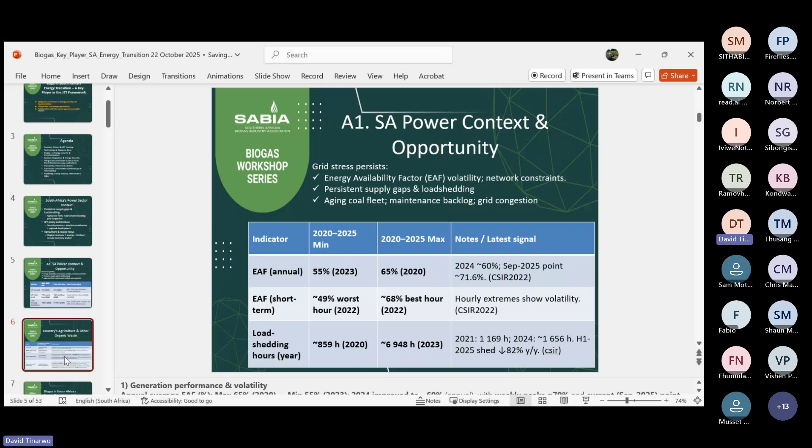Then also on the other side, we look at the amount of waste which we generate from food and from our municipal sewages, from our agriculture in the form of poultry farming, and also abattoir, where we slaughter our animals for meat. We generate quite a lot of waste, which is really a problem in the country, to say how do we manage that. Then we look at the potential of biogas to solve that problem.

So we say, why biogas then? Why do we think biogas can actually be a solver of these problems? The reason being that biogas technology can change all these organic residues to energy and fertilizer. And that makes the core of a circular economy, where we will actually not have anything which we would call waste, which goes unimproved to make a difference in our lives.

So also then we look at what we get after having converted these to energy and fertilizer. In terms of energy, it has quite more advantages than the other renewable energy technologies. Take, for example, you have solar, you have got wind. And with solar, you cannot say absolutely I can assure you that I will always have my energy, unless you are saying you will have a big storage in terms of battery.

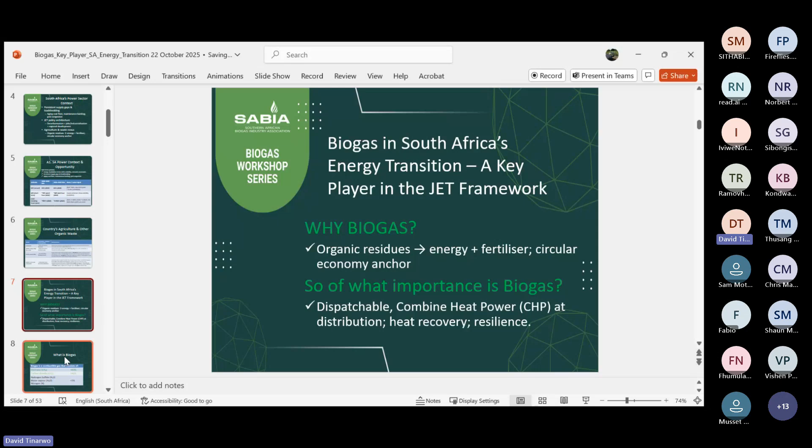So also, when you look at the conversion of this biogas to energy, you can actually increase the efficiency of this by generating electricity, but at the same time recovering the heat for other uses. So that way, it suits very well as an efficient way of converting waste to energy, and serves quite conveniently more than these other technologies of renewable energy, which we know, like solar and wind.

So what is this biogas? For those maybe who may be novices in this area, just a quick review on what this thing is. The biogas, of course, we get it from anaerobic digestion of organic material, and this results in a gas which is composed of many gases in it, which we call biogas.

The constituents of this biogas has plus or minus 60%. Of course, it ranges depending on the feedstock, and also the time it has taken running. So we have as an average plus or minus 60% of that gas being methane. Then around 40%, plus or minus, of that gas being carbon dioxide. Then these other gases, which include hydrogen sulfide, water vapor, and nitrogen, constitute less than 5%. So bulkily, we have methane and carbon dioxide.

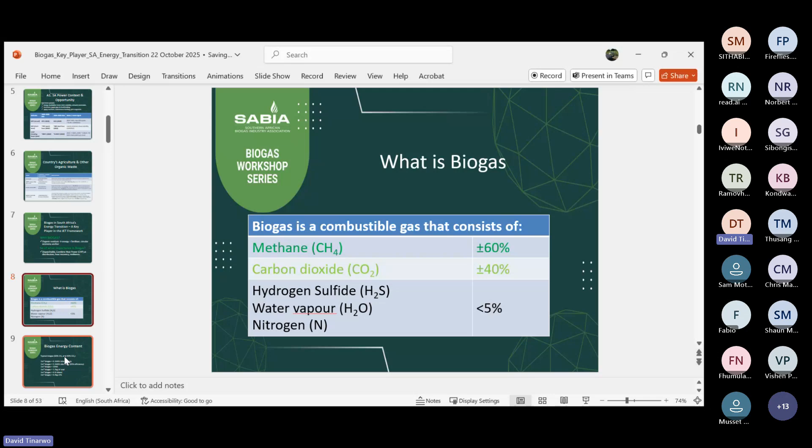And the most important gas, which we are always going for, is the methane, because the methane burns, and we need to burn it to get the energy which we need, convert it into different forms of energy, heat or electricity, and so on.

So to give you a rough idea of the equivalence of the biogas to other forms of energy which we already know. For example, 1 cubic meter of biogas is equivalent to about 6.1 kilowatt hour of total energy, which includes electricity and heat.

Then on electricity, because of the conversion through the generator, which loses some energy through heat, we remain with about 2.1 kilowatt hours of electrical energy. So you see the efficiency of that conversion from gas to electricity is around 35%. But of course, if you then harness the heat, you improve the overall system efficiency.

So the other equivalents are biogas with coal, with diesel, and with LPG. You can see 1 cubic meter of biogas is equivalent to 0.4 kgs of liquid petroleum gas, the one which we buy from the garages and cook with. So this can actually really substitute that gas for cooking.

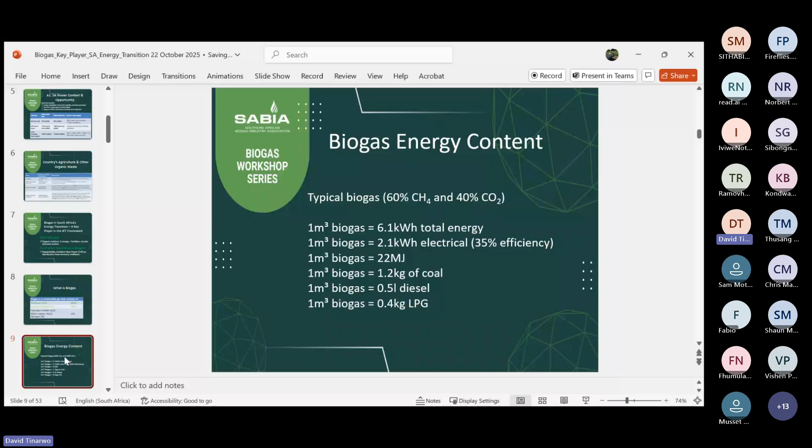All right, so how does it go? Just to quickly review how we generate the gas, of course we have organic waste, which is put into an anaerobic digester, which is a container that is airtight and watertight. It does not leak water, and it does not allow unwanted oxygen in, so that the process can take place and generate the gas.

But one more important thing is, besides generating gas, the whole lot of stuff which remains, which we call digestate, the remaining slurry stuff, is a very good fertilizer for farming. That means after getting your gas, you don't throw away what is remaining. You actually use it to replace synthetic fertilizers, which are detrimental to the soil, detrimental to the environment, and even detrimental to the pocket.

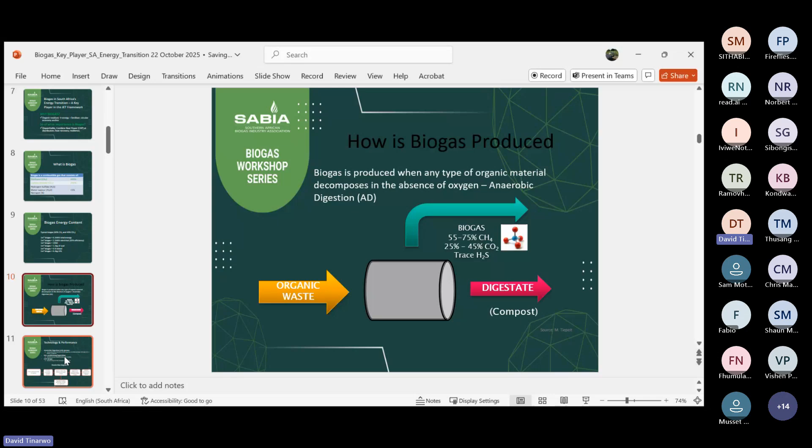All right, so just a flow chart of what takes place in this technology. We look at how we move from the starting point until we get to the gas and use. So the first part is intake, where we are receiving the feedstock, which is organic material that can be animal waste, plant waste, or even municipal organic waste. We receive it, weigh it, separate and treat it, macerating it, cutting it into small pieces for easier digestion, then introduce it into the digester.

The digesters can be of different kinds: continuously stirred tank reactor, or plug flow, or dry, and we also mix it so that the process takes place very well, so the bacteria responsible for generating the biogas can reach all particles of the feedstock.

Then the gas comes out, and we can clean that gas and remove unwanted gases like carbon dioxide, hydrogen sulfide, and water vapor. We can clean it and make the gas almost high quality methane for use in CHPs, combined heat and power generators, or in other generators, or any other function, or even to run vehicles at that grade.

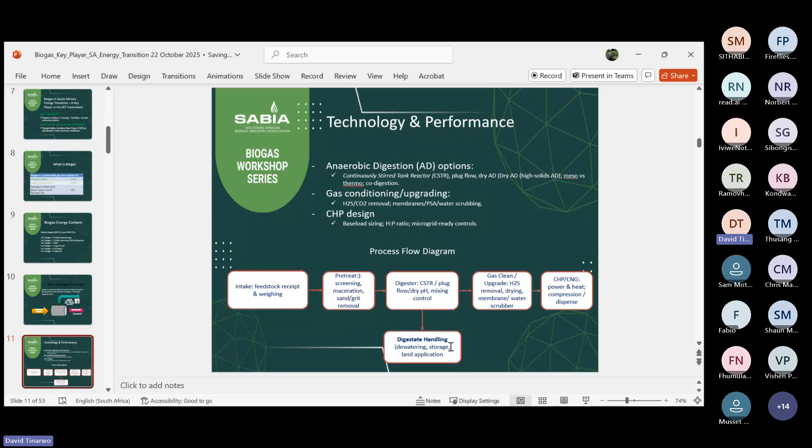So already I am pushing you to understand how this covers all the functions of these other forms of energy and fertilizer which we originally have. So biogas is covering all that. And if you look from the sorting of the waste, carrying of the waste, to processing of the waste, and generating and manufacturing of the generators to run, manufacturing of vehicles to run on biogas, light equipment and all the stuff, all those are already pointing to creation of jobs in the chain. So biogas is coming with a lot of job creation.

If you look at farming, where you are getting the waste, quite a lot of activity takes place. If someone forgets about buying synthetic fertilizer and concentrates on getting fertilizer from the biodigester, you can imagine how many people will be involved in that exercise.

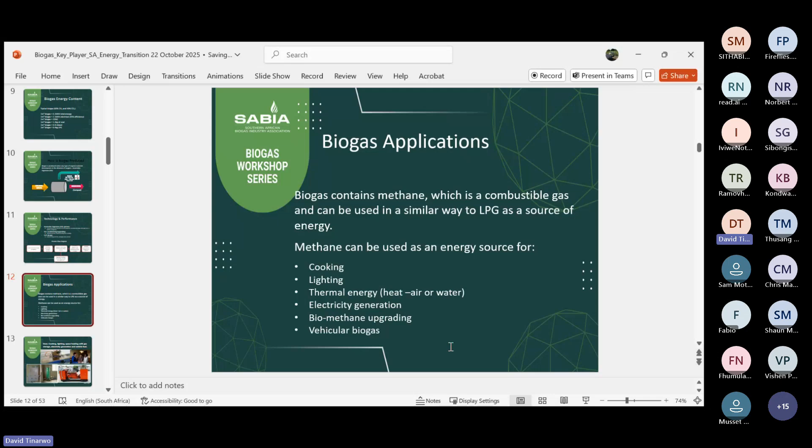So this next slide shows a range of uses which I was talking about, like cooking, lighting, space heating, and even electricity generation. On top of that, we can also store it in very big tanks, and that already points to that collaboration which I was talking about with the natural gas industry, and of course for running vehicles.

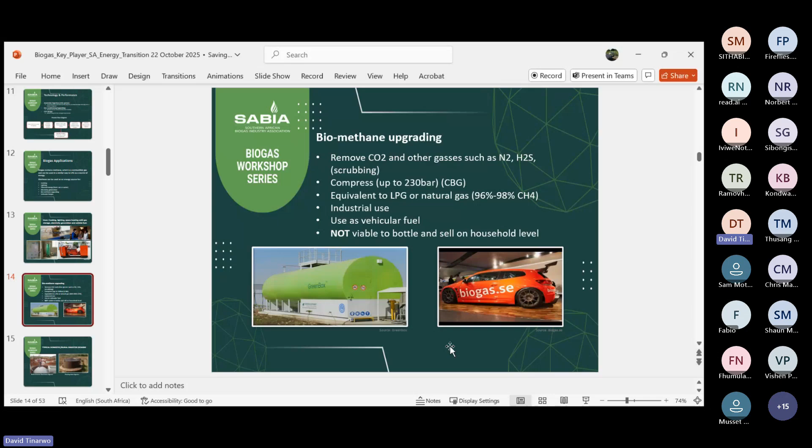Yes, we also need to have a rough idea of the different types of digesters. Here in South Africa, we've got quite a number of types of digesters which are implemented. Some of them are brick built, done underground. Others are, of course, the floating dome, which is mostly found in countries like India. In South Africa, there are not very many of this kind of digester, but in India there are so many.

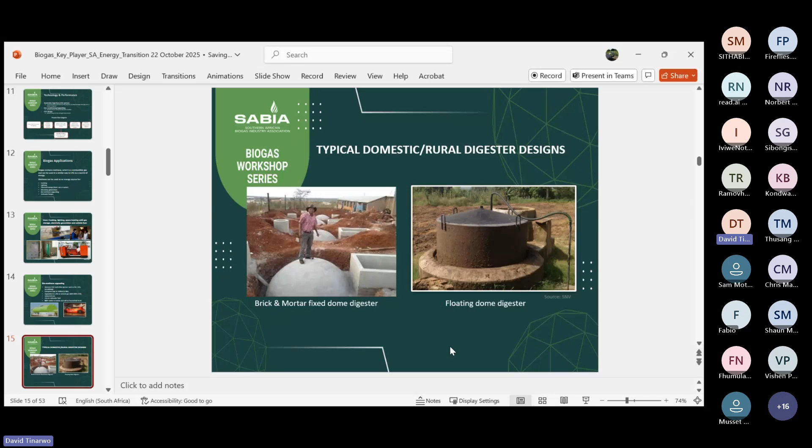But also here in South Africa, we have quite a number of prefabricated digesters, like for example the Biogas Pro, manufactured here locally.

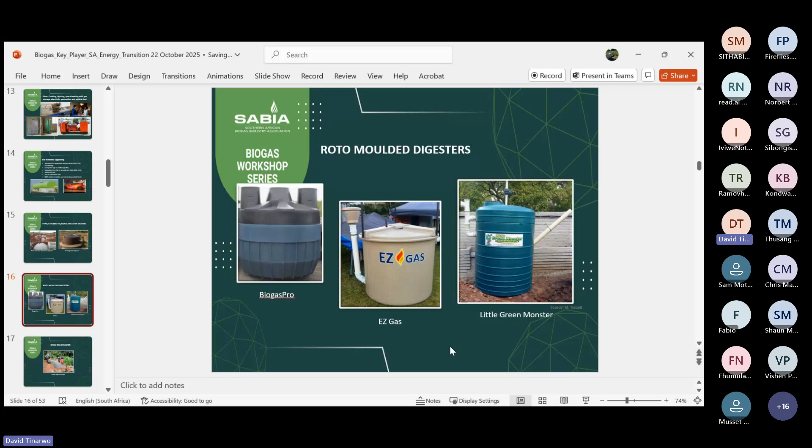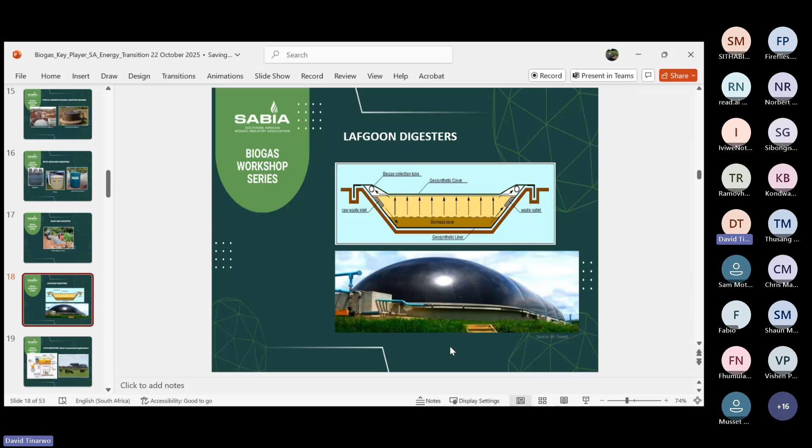This is made by a company called Gamma here in South Africa, and others which are coming. Many people are starting, some are even using Jojo tanks to make digesters. We also have tube digesters, which are easy to install and cheaper to buy. We also have lagoon digesters, which are mostly suitable for dairy farming, where you want to capture the slurry lagoon from the milking parlor and put in the conditions for biogas generation. So these are the different types of digesters which we have in the country.

And of course, in our wastewater treatment plants we also have digesters. It's a surprise that not much has really been done to harness the gas. In most of these sites, you find they flare it. If it is not flared instead, and captured and harnessed for energy use, then that will constitute a very good candidate to really fit in the just energy transition.

Right, so here I summarize a bit. I don't know, since it is not in presentation mode, the slide might not be properly visible, but here I'm summarizing why biogas, why now, and how it supports the just energy transition.

We are putting biogas in the middle, and we have a triangle where the vertices talk to those components which it responds to, like energy security and costs, where we are solving the persistent load shedding and high tariffs of electricity which we are experiencing. So we can avert that problem through the utilization of biogas. We are also decarbonizing the energy sector by using biogas, where instead of leaving animal waste to emit all the methane into the atmosphere, we make that methane emitted in controlled situations and harnessed and used.

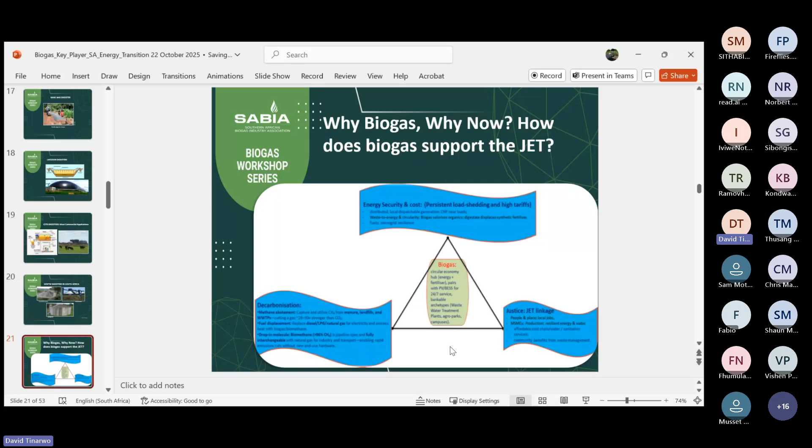Then also, if we look at the creation of jobs, that really answers the proper linkage of the just energy transition, where we have a lot of MSMEs working in different ways contributing to biogas technology. Others can be manufacturing stoves, refrigerators, heaters and so on which use biogas. And that is creation of employment and hence regional development.

So the next part of my presentation is just to talk slightly about what can be done. But otherwise, the main issue I've already put forward is that we've looked at biogas as a means to give energy security. We've looked at biogas from the social aspect, the creation of employment and organic food from organic fertilizer that improves human health. So in that way we are servicing an imperative from the just energy policy, and also we look at reduction of costs. We know our energy is currently so expensive, and with biogas we can actually reduce all those things.

So now, when we look at its applicability, biogas can be generated anywhere where there is waste, and hence it's suitable for decentralized electrification, decentralized energy supply. So we can hybridize it, putting it in as a component of a hybrid energy system where we integrate solar, biogas, wind and others together.

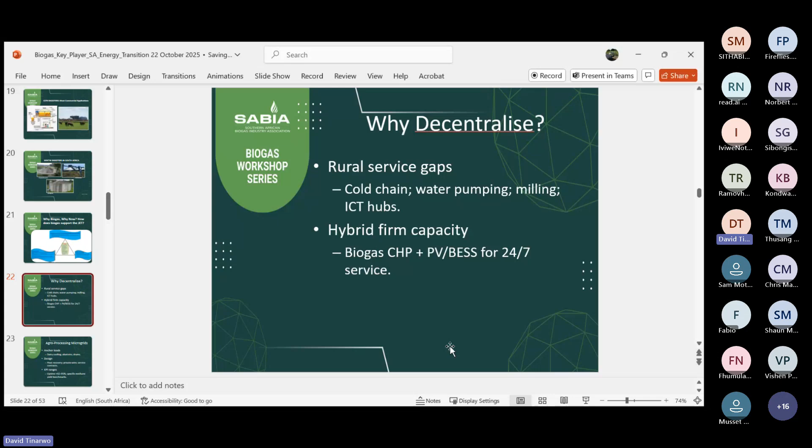You need to be slightly bigger so that you can run the generator for a reasonable time. All right, so also we have some

functions in agro-processing, microgrids, where we have biogas playing a role in a dairy, cooling and abattoir, dryers, and so on. And we also have recovery of heat, and we can even improve this biogas to reach qualities of our natural gas. So that is a possibility. So that way already we are saying we can actually make biogas collaborate with the natural gas.

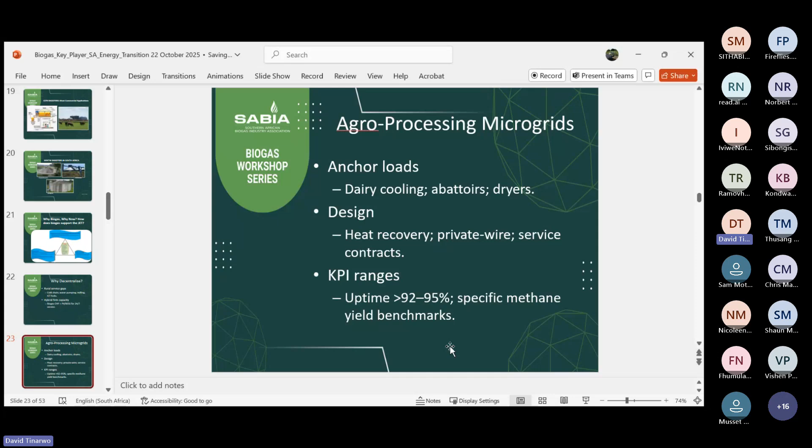On irrigation, agriculture, as I have said, we have challenges of water in the country. We use water for generating biogas, but at the same time, that water is not used and lost. It is still recovered and utilized for irrigation, and which is irrigation not just with water, but with water which is improved with the minerals or nutrients for the plants.

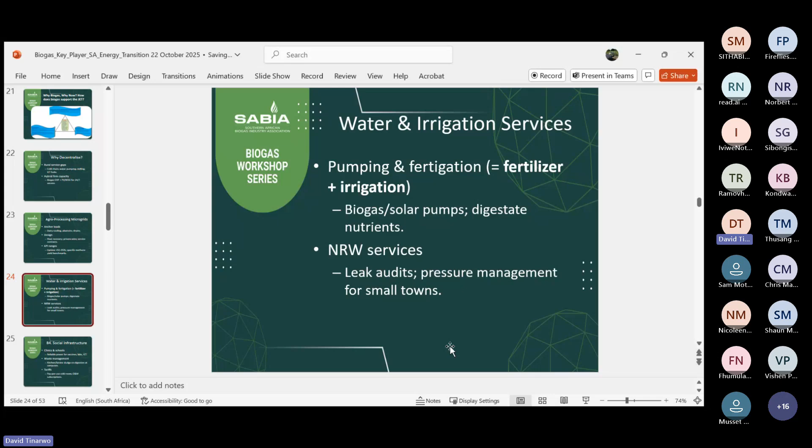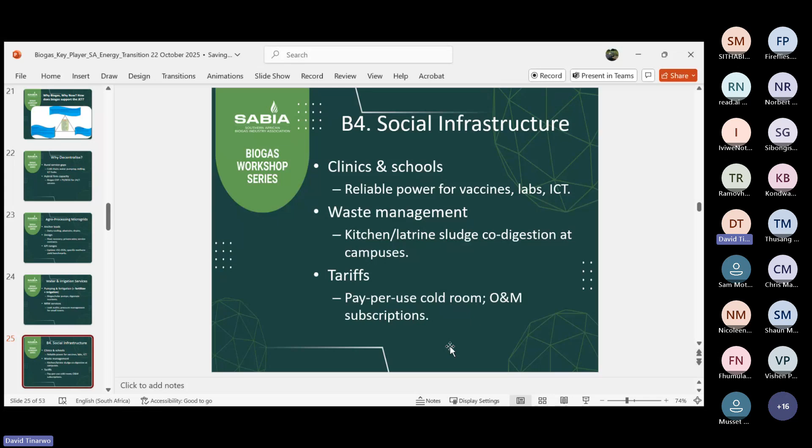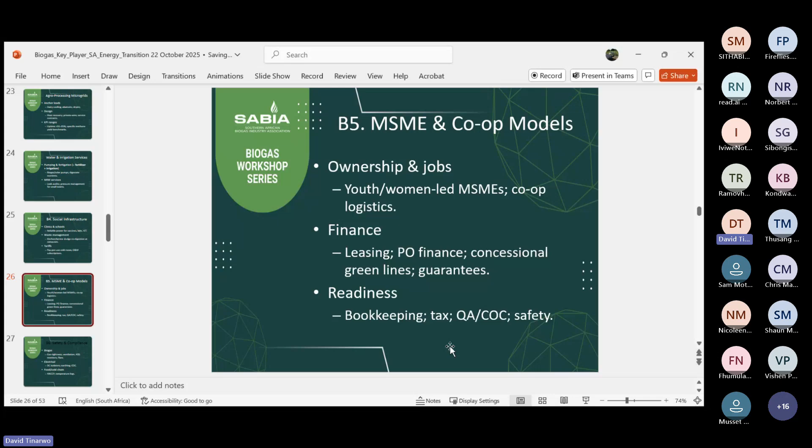This is talking again to those MSMEs and cooperative models where they are working together with those institutions like schools and hospitals and all the stuff.

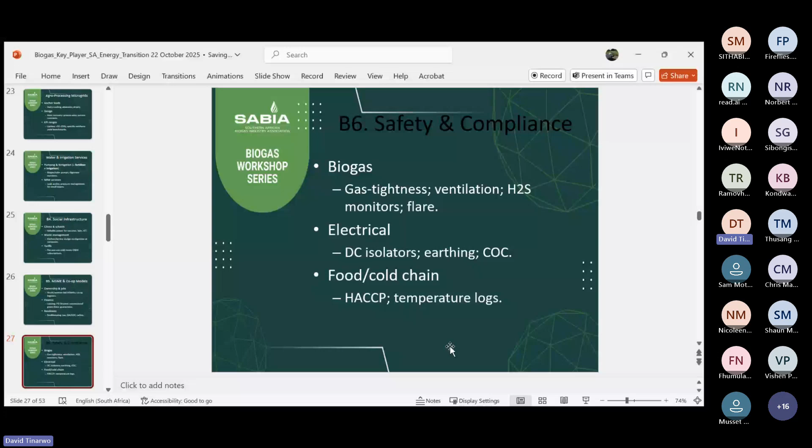Then also, of course, in doing that, we need also to look at compliance in terms of safety, how to use it, and so on. Although we can safely say at lower pressures, it is even much safer than the LPG. But of course, details of what needs to be done in order to secure safety of people in the use need to be outlined wherever it is being used.

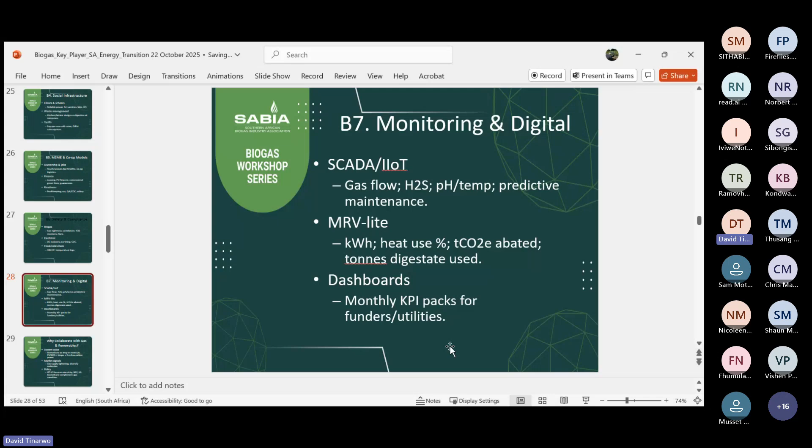And monitoring, of course, this is when you are having the systems which are working. We can also do improved monitoring systems of this to see how our systems are working, even remotely, and so on. So you can see all those are talking to need for creation of employment, research, and so on. So many youths will be involved even to design those SCADA monitoring systems. They need to be designed by people and hence actually creating employment for them.

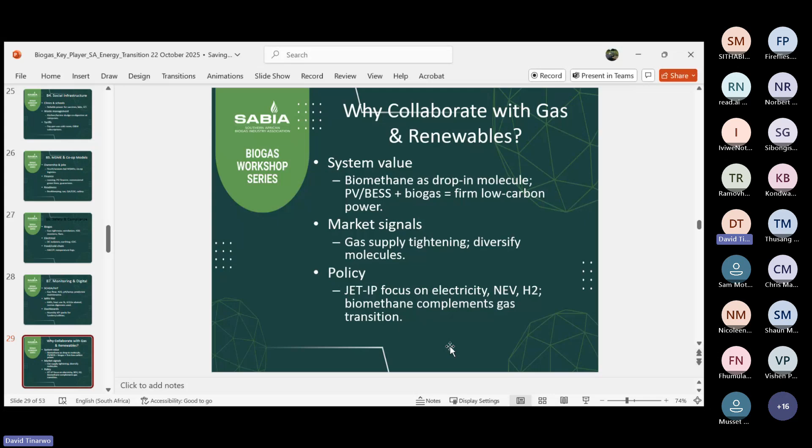Then, of course, I was talking about this collaboration with natural gas and why do we need that? Of course, because the biomethane can actually be improved and can be also used in hybrid systems where you have got other forms of energy. And also gas supply needs to be properly controlled and all the stuff.

I think let me just stop here and allow questions to come. I have so many slides, but I think the gist of the story, which is looking at the biogas in the just energy transition, its contribution, its role, I have touched. So I can stop here to allow questions so that we can even explore more during the question and answer. Thank you very much.

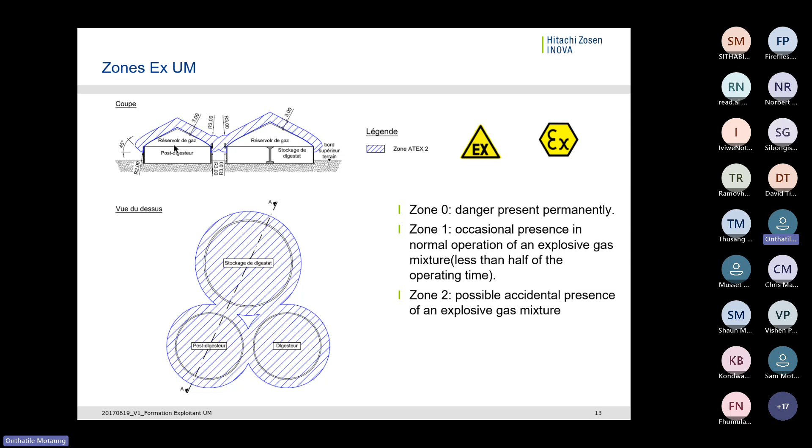All right, I'll step off from there now. So now we'll look at the tanks, the biogas tanks - basically the roof, what the roof looks like, heating, agitation, and auxiliary equipment. The tank roof of the biogas digester - let me just go back if I can.

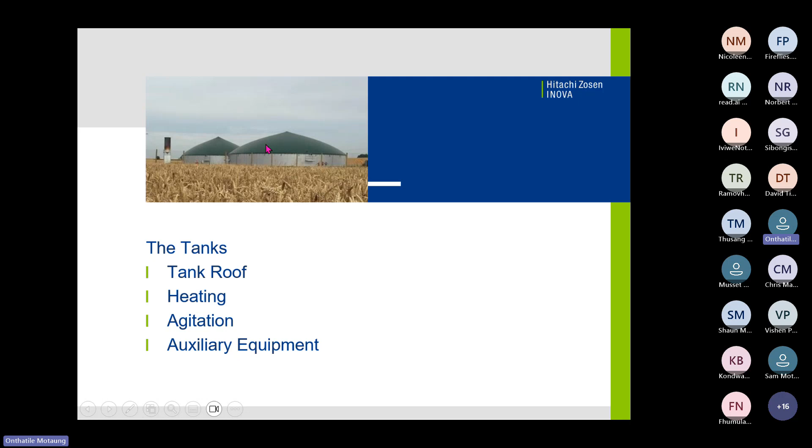So if you look at this, this is the type of digesters that I'm talking about. These are the stirred, continuously stirred tanks. The roof is really this dome-shaped membrane. So that's what I'm going to be talking about now.

This is called a floating tarpaulin with double membrane. So it's a tarpaulin, which is basically a canvas. It has a double membrane, an outer and inner membrane. The outer membrane is PVC membrane, coated with anti-UV protection. It's basically a cover that protects the inner cover. That's the top cover, the outer cover. The inner cover is a low density polyethylene membrane.

This one is for gas storage. So the top cover protects the bottom cover because UV damages plastics and rubbers. So the protection that the outer membrane offers is against the sun, but also against moisture like rain, and the forces that can be imposed on the gas storage membrane by wind and rain. The outer membrane protects against that, while the inner membrane is used for gas storage. So basically, as the gas gets generated, the inner membrane expands to provide temporary gas storage in there before it can be fed into another tank, which is a storage tank.

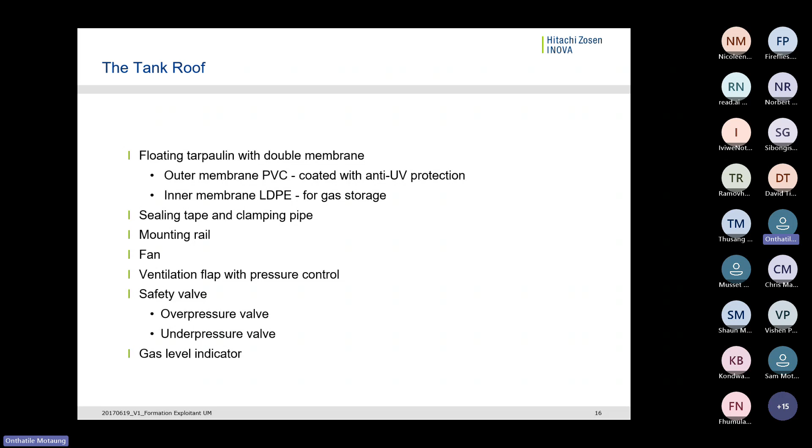There is a ventilation flap for pressure control as well between the outer membrane and the inner membrane. There is a safety valve that helps for overpressure and also under pressure. And then there's also a gas level indicator on the tank.

I think if you can see on here, do you see my cursor, right? Yes, we can see it. You can see it, yeah.

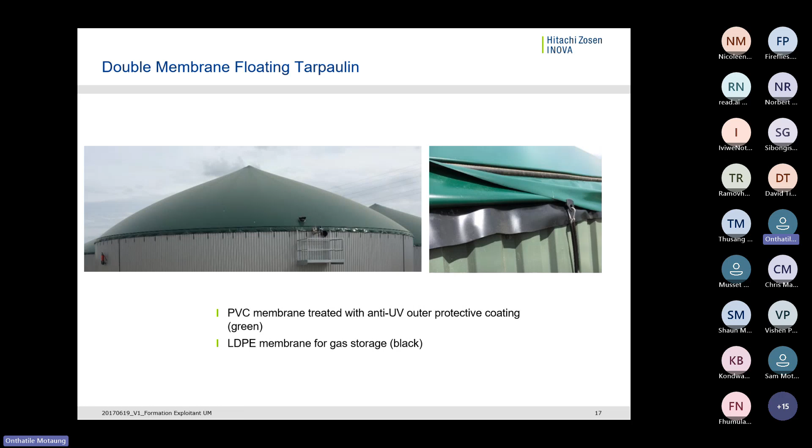So you can see again, though I'm not talking about this today, but I'll just mention, you can see there is a net here. Inside there is a net before the inner membrane. The net, most of the time, is used for biological desulfurization inside the digester. It will be coated with a slurry, and then there is an oxygen generator that will blow in a tiny bit of oxygen to enable a reaction to happen on this net.

So I've had the opportunity of traveling with the maintenance guys who overhaul and change the equipment for the digesters. Once, after 5 or 10 years, the digester gets emptied and they take out stuff. You can see on the nets and on the roof of the digester inside, yellow sulfur collecting there. But I've just learned that this net also, with time, builds up a lot of elemental sulfur, which will actually cave in and fall into the digester, and then go out with the substrate, with the digestate. The sulfur gets added back to the digestate, which is used as fertilizer, as the professor has already indicated.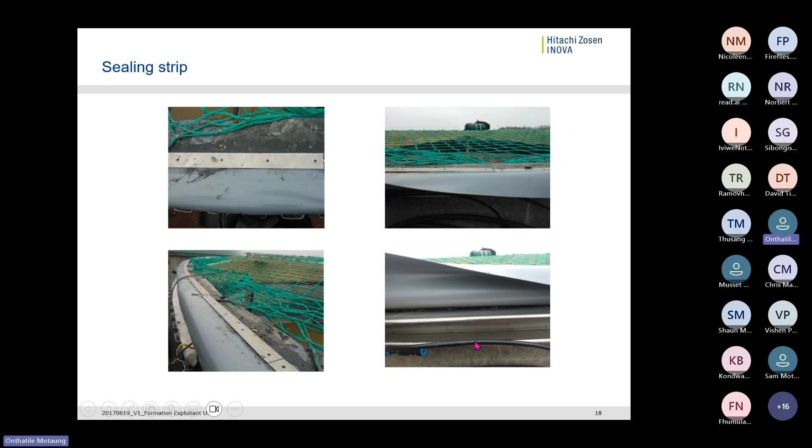So that's part of what this does. And then you can see the pipe that I was talking about, that is pressurized. So there is a compressor as one of the equipments that is used in this case.

On this slide, it's basically a number of tanks, not just one tank. There is a storage tank, there are secondary tanks, and also storage tanks for gas. So the compressor supplies compressed air to a number of tanks. Hence, you have a manifold with distributions for different areas.

So here are just the daily checks, which are mundane, nothing special. You have to make sure that the compressor is operating, because compressed air is used for different things. If the compressor is not working, you will have a number of instrumentation and other things not functioning properly. Making sure that there's no leaks. The compressor can operate while it still has leaks, but it will actually waste a lot of energy, because part of the operation would be wasted on the leaks instead of the purpose it was designed for.

Just make sure that things are tight. And I think here, this is a better picture that shows that clamping pipe that I talked about. This is the top of the tank, the roof, and this is just a bit of the membrane, so you can see where it goes, and it gets supplied by compressed air.

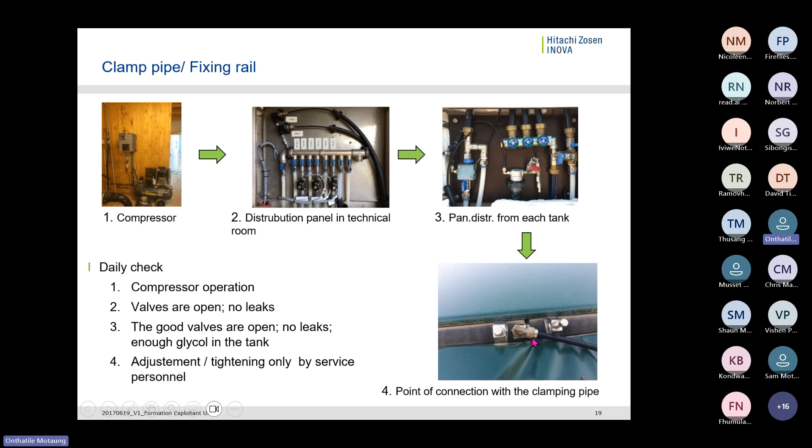This is still the compressor. It's just basically things that you need to look at: the condensate, oil levels, and ensure that the valves are open to supply areas that are required, and also the chiller or the cooler for the compressed air, to ensure that condensate is removed from the compressed air.

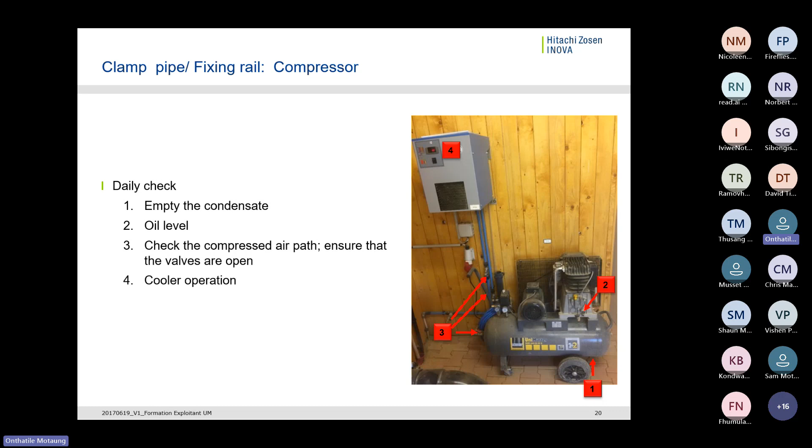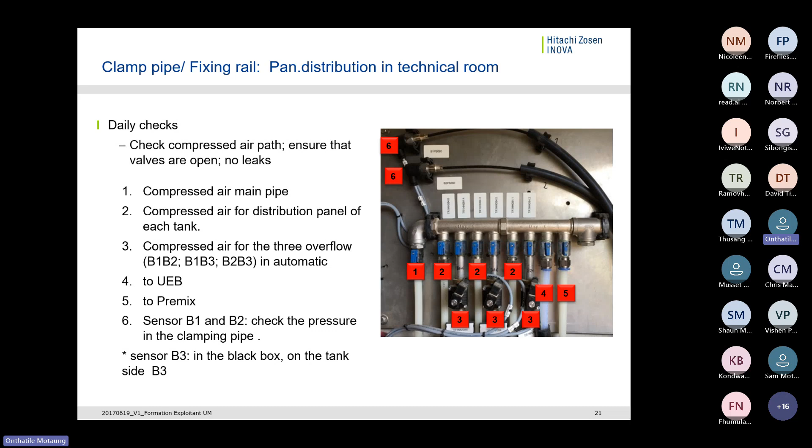Okay, this is more of the same. It's just a distributor for compressed air to different areas, digesters or storage tanks, and then also to the instruments that use compressed air. Okay, same picture.

Okay, so now we come to the fan. We've spoken about the compressor, what it does. Now the fan, I had mentioned earlier that the fan blows air between the inner membrane and the outer membrane. So this is the picture that you see here of the fan. Your fan is here, it's a small fan, the inlet, and then the motor is somewhere here, and that would be an ATEX rated motor.

So like I said, ATEX as well, what I forgot to mention is that in order to work on the ATEX equipment, you need to be appropriately certified. And then the company, if you take it for overhaul for whatever, the company that does this needs also to be ATEX certified or approved, because there needs to be tests undertaken to ensure that this motor cannot be a source of ignition for gas. So it's very, very important. These are the things that we don't look at closely, but these are the requirements for a successful operation of a biogas plant.

So the fan offers stability for the membrane. It offers pressure to help the gas flow through to the vats, other storage tanks in this case. And it works continuously. If there is an issue with the fan, it has to be attended to immediately, because that can have a catastrophic effect on the whole operation. So it's a very important piece. It's a small piece, but very, very important piece.

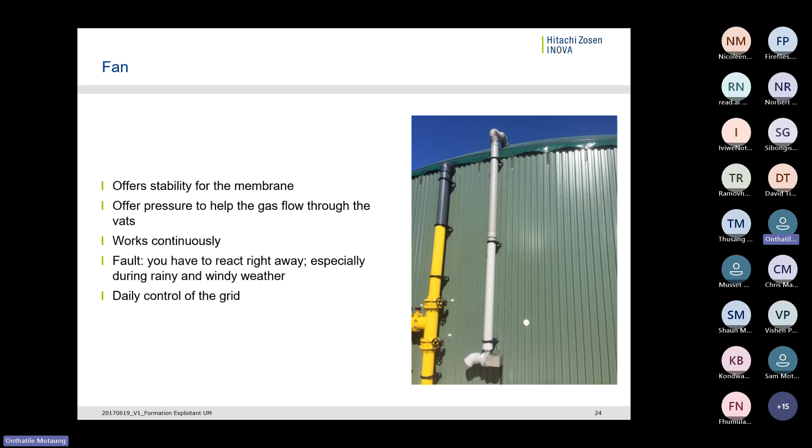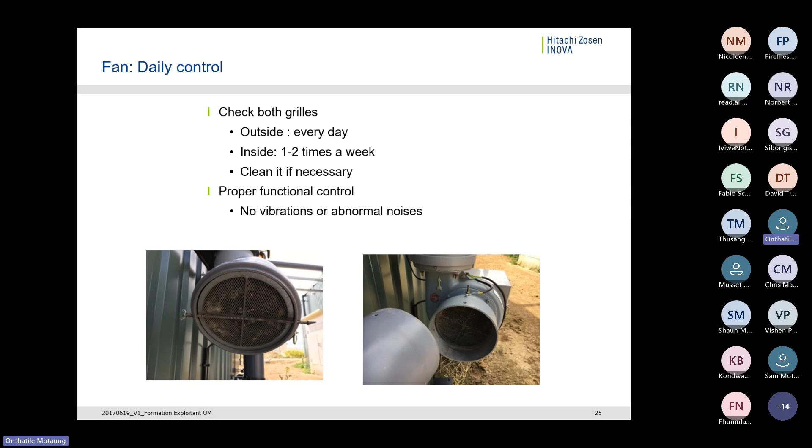So these are just the views of the fan. You can see the grills. These grills need to be inspected and cleaned to ensure that the air passages are operating properly. And then also, with maintenance people here, you also use your 5 senses to identify if there's issues. You can listen to vibrations, heat. If you hear abnormal noises, as an operator, you need to call maintenance to come and check, because this item needs to be operating continuously.

We spoke about the ventilation flap. So it's a flap on top of the roof that basically regulates the pressure between the outer membrane and the inner membrane, to allow the digester to have a safe working pressure, while also allowing gas to be evacuated from the digester to the storage tanks.

I'm not going to go into the settings, because that's not really necessary. My focus here is understanding the bits and pieces of equipment you find, which informs the maintenance and operations activities at the biogas plant. There are also automation slides I won't show, since most instrumentation is monitored in the control room on the SCADA system, with automatic activities triggered if operating parameters go out of set limits. But that's not the focus today—the focus is mostly the mechanical equipment.

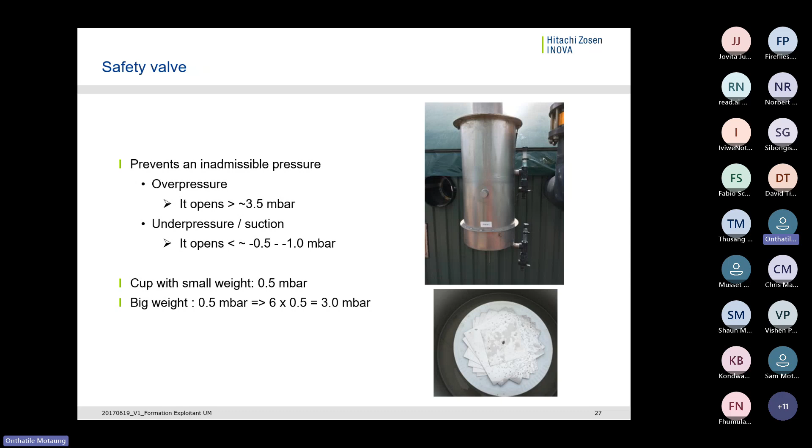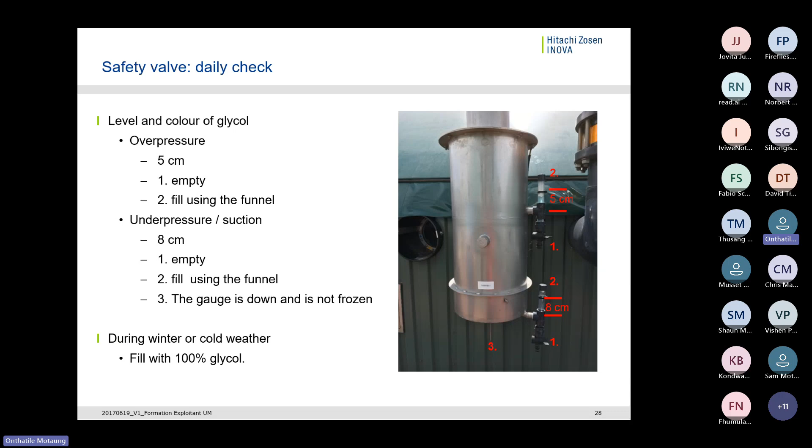There's also a need to understand the level of substrate in the digester, so there's a level gauge calibrated for levels at 20%, 60%, and 100%. This works together with the feeding of substrate into the digester, so the levels need to be known, along with gas yields and so forth. All this goes into the SCADA system to perform automatic functions, mainly shutdowns or prevention of certain activities to ensure the digester operates safely.

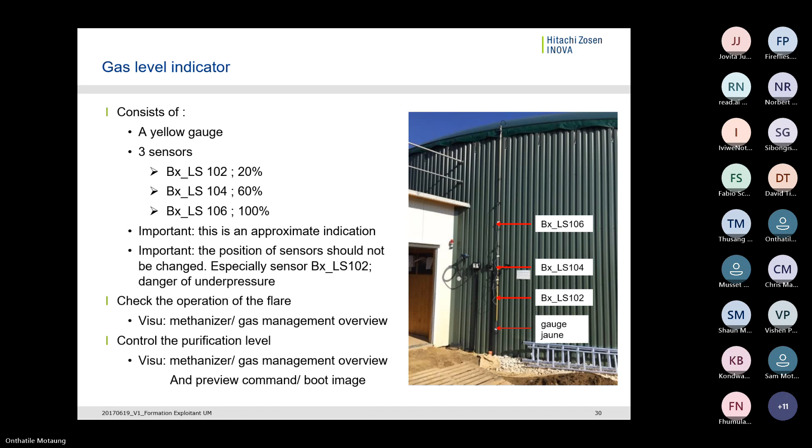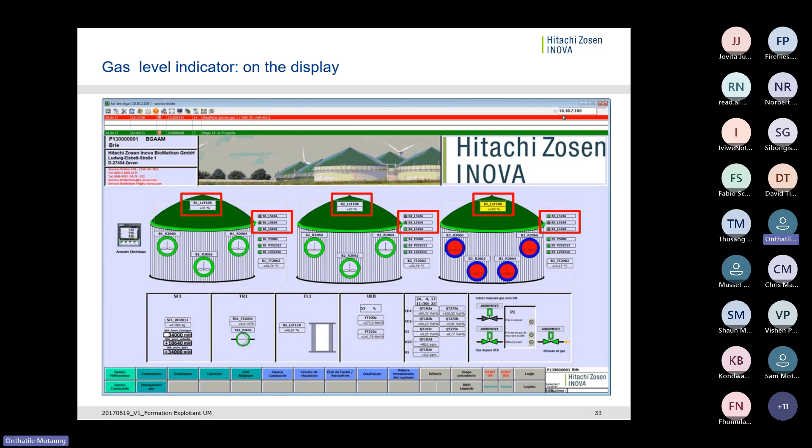This is just a schematic—I kept one of these to show you what the screen looks like. In this case, they have three tanks: one is a secondary tank, the other is probably a storage tank. All parameters from instrumentation will be monitored in the control room by the operators, and the settings of different equipment, valves, and instruments will be done on the screens inside the control room.

Going further, one of the most critical things in a biogas digester is maintaining the temperature that the microorganisms in the digester need to function properly. In this case, it's a mesophilic process, with temperature around 40 degrees. What you're seeing here is a digester that's open—there's a center post, and beams that balance the net I've shown you, which during installation also balances the inner membrane.

That's what you see here, and the heating is done through this—these are plastic pipes that go around the digester, which is what heats up the substrate. These pipes move water inside the digester for heating, to keep up the required process conditions. This is a very important aspect of biogas digestion—if you don't have the temperature right, there will be no gas produced in your digester, so it's very important to be aware of that.

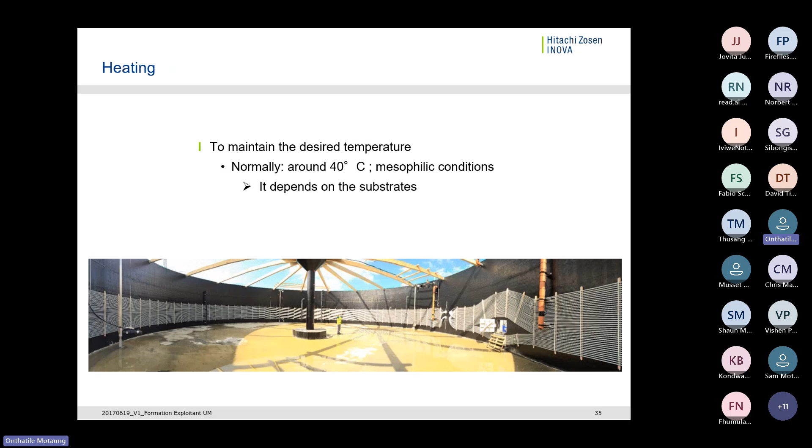So this is just a bank of pipes going to different digesters. I won't talk more about them, but what's important is that the inlet temperature should be around 70 degrees to allow for the dense mass of the substrates, accounting for losses as you transport the water. In Germany, mostly the hot water comes from a CHP, because I'm sure 90% of plants there upgrade the gas from biogas to biomethane, but some gas is used in a CHP to generate electricity for the farm, and they also feed it into the grid. The CHP recovers heat from the exhaust and from the body of the engine, from the lubrication—that recovered energy then gets dumped into water to heat up the digester.

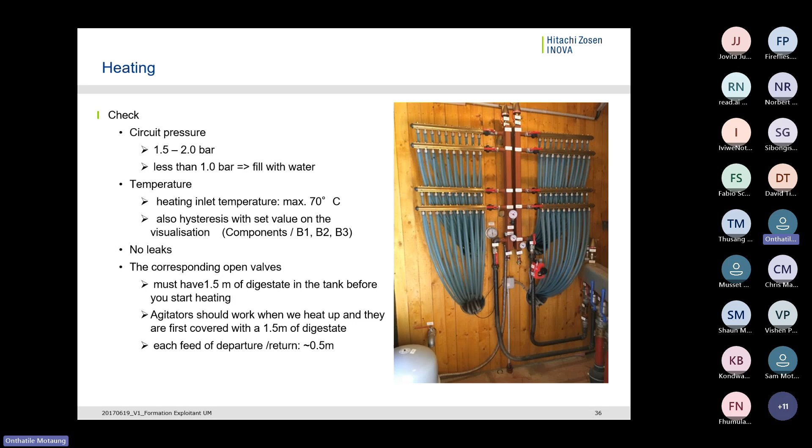Okay, this is just the labeling.

This is basically automatic vents for releasing air out of the pipes. This is necessary when you are transporting water, mainly hot water, to release air, which can cause flow fluctuations and also vibration in the pipes.

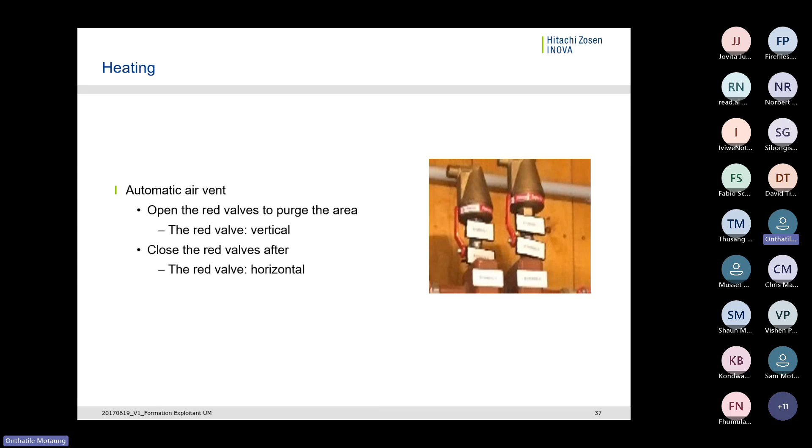So the next important piece of equipment in the digester - it's not very clear here, but if you look at my cursor, there's a post here, and another one at the back. On this post you would see the agitator. It looks like a boat propeller - it has blades, and then it turns.

The function of it is to maintain a homogeneous digestate inside, so that all the digestate that has been fed is accessible to the microorganisms for digestion and fermentation for the creation of gas. But it also helps to avoid floating layers - I'll show you the pictures - sedimentation of heavy substrates, gas pockets with thick digestate, and also other biological problems that can arise from digesting a digestate or substrate that's not homogeneous.

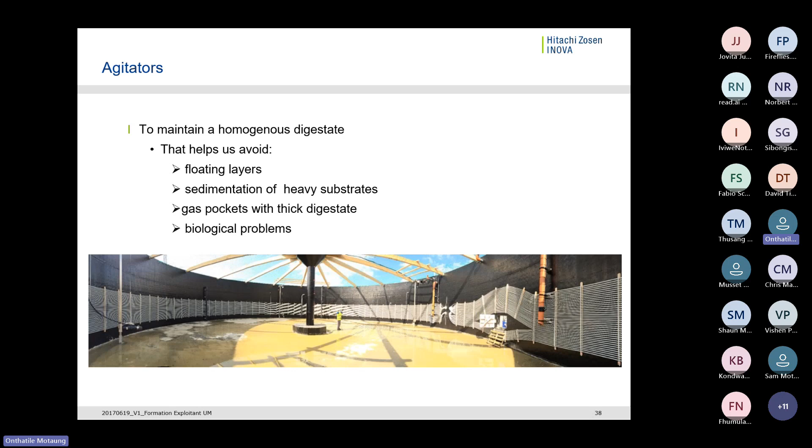You can see one here, and then there's another one here. It's on a rope, meaning its position vertically can be adjusted, but there's also a cantilever beam here that goes towards the inside of the digester. This allows for horizontal movement or adjustment of this piece of equipment to access maybe towards the center, to avoid a dead zone. So you can actually move your stirrers or agitators to different places.

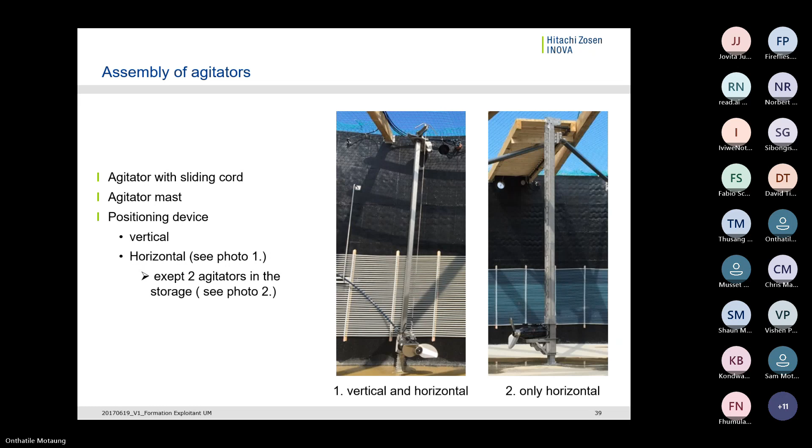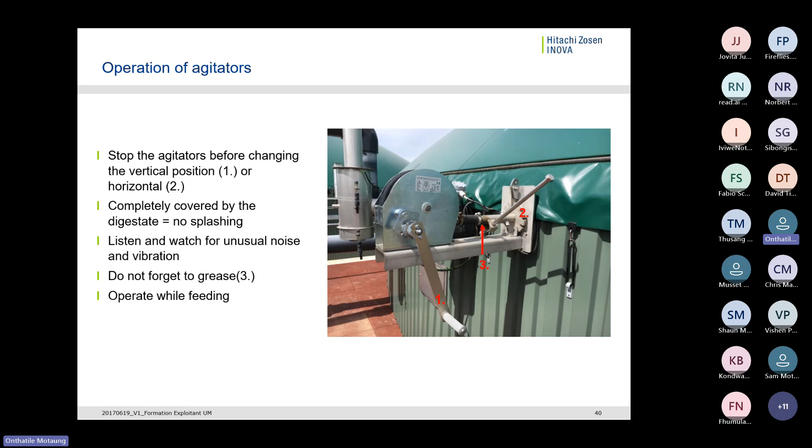Let me see what the note says here. This needs to be completely covered with digestate - you don't want splashing and creating a lot of splashes inside. But their operation also needs to be observed to make sure they are functioning properly, because you need them. Things like unusual noise, vibration, and greasing of the actuators or adjusters needs to be done regularly. I think the other important thing is to ensure the rotation is not counter - they should all be rotating in the same direction, to ensure you have a nice swell of the digestate inside the tank.

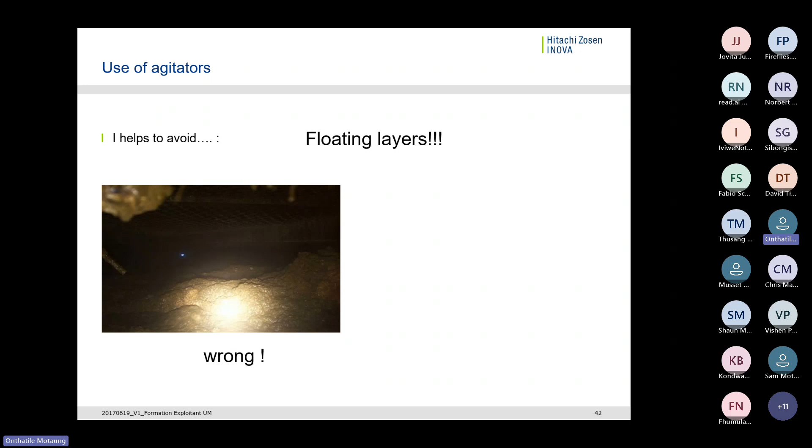So these pictures show you what happens if the agitators are not working right. You can see how it looks in here - this is not what you'd like to see. You'd like to see uniform, liquidy, moisture substrate inside the digester, and you can see where things actually fell apart completely. This is at the top of the digester - I think this digester went bad because you can see that's the dry stuff right at the top.

So probably level probes and other things that tell you about the height didn't function for whatever reason, because you can't have the digestate or substrate being this high in the tank.

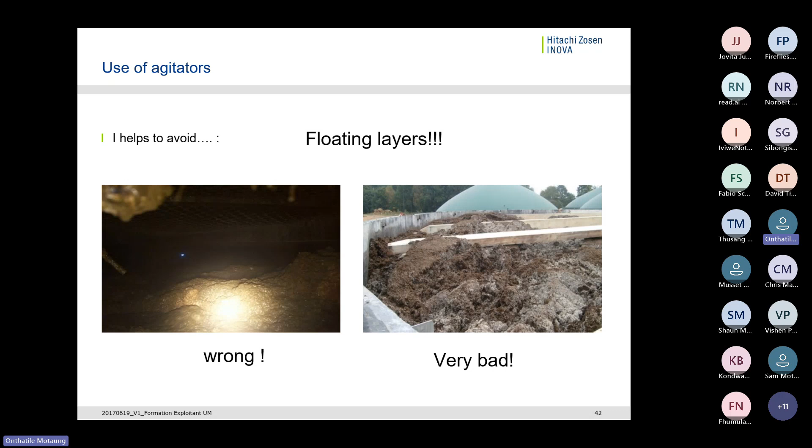Other things we talked about - this is a double rod probe. In an earlier slide I had shown there are level indicators for the substrates inside the tank, but I think there was a warning on the slide that those are also approximate.

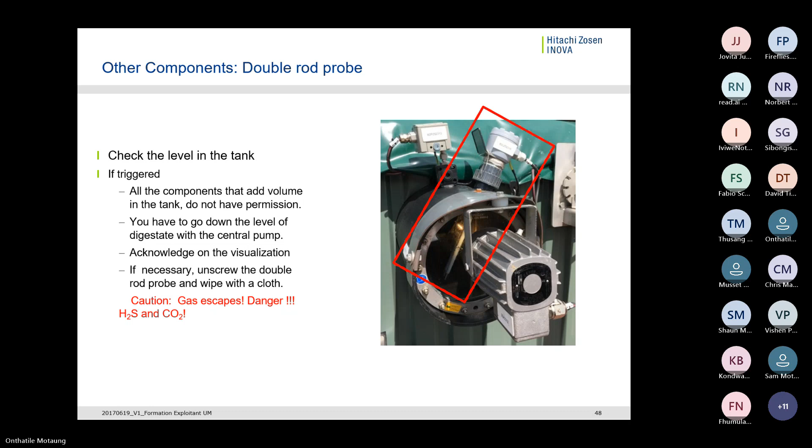It's approximate, not definite, where the level probes tell you the substrate is. So there is an ultimate stop or ultimate detector, which, if you didn't read properly or there was an issue with the level indicators, will actually tell you that there is material hitting the probes. Then what will happen is that it will disable further feeding of the digester to ensure that the previous situation we just looked at, where the substrate is high in the tank, doesn't happen. So these are those safety controls. There's also pressure sensors for the inside, which, if the pressure valve is not working properly, will catch that and ensure appropriate action takes place to address what's happening with the safety valve.

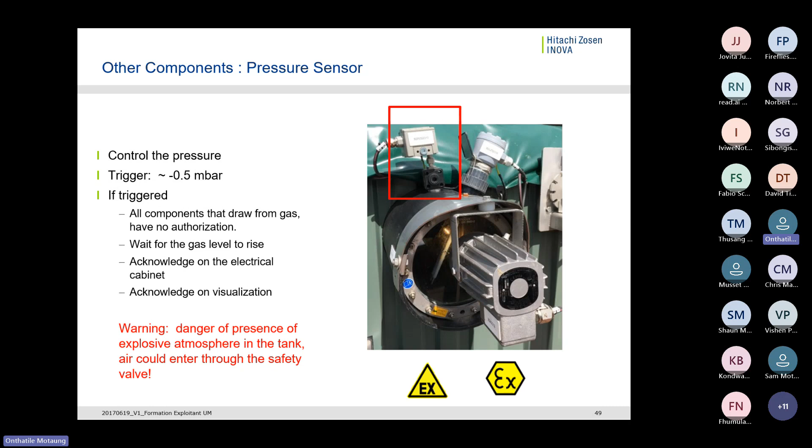Now lighting: because we are now towards the inside of the digester, it's zone 0 according to our ATEX rating, meaning gas is there permanently. So you have lighting there to see, but this lighting must be ATEX certified. This comes again to the point of zoning around the digester, and then the type of equipment that must be there. In fact, even all these instruments here are ATEX approved or ATEX certified. They cannot create high enough current to create sparks, and the enclosures are also sealed completely so that no gas can go in there. The heat generated by the item itself is not sufficient to create fire. That's very important to note.

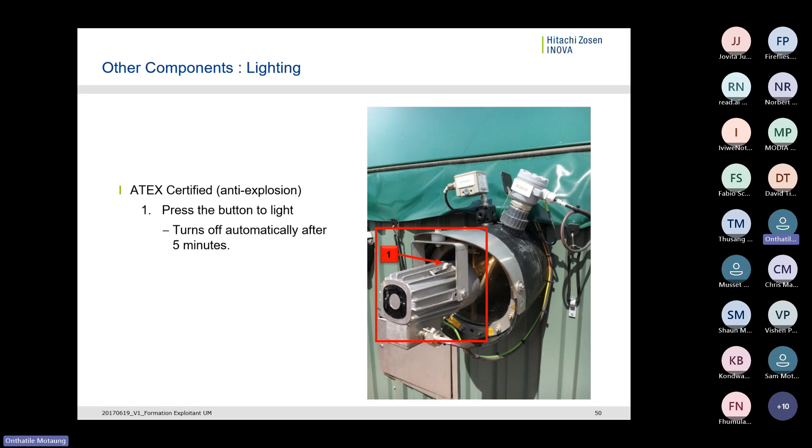Now this is further away from the tank itself. Now we have the feed hopper and a premix. The hopper stores the substrates that come in. Like I said, in Germany in this case, most of them are cash crops, so they will have co-digestion of different cash crops together, because maybe the yields are better, or the digestion takes place better, if you have multiple crops being co-digested together.

Then the premix mixes the substrate together with digestate before it can be fed, or before it can go into the cutting. There's a Rota-cut - like a pump that slices the substrate into smaller pieces, to make sure that the nutrients are available or accessible to the microorganisms. So the idea here is basically to achieve a homogeneous mixture in the digester. You don't want the microorganisms to struggle. You want them to find the substrate in a form they can work on directly and produce more gas, because the name of the game here is gas production, not struggling.

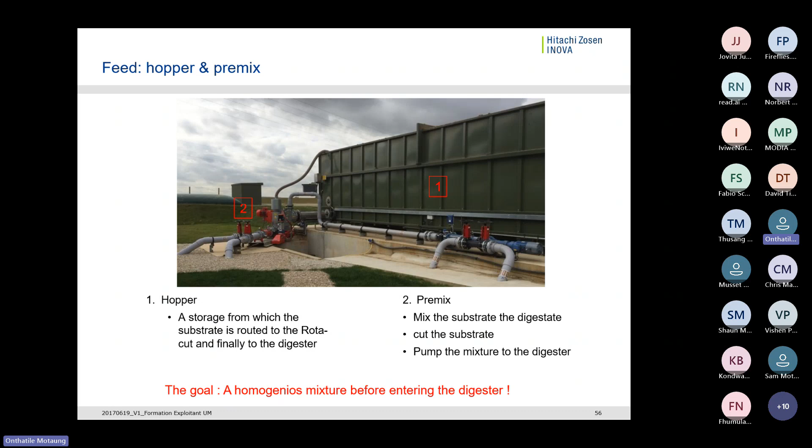So these are the parts of the hopper. The hopper has a sliding floor - you'll see what a sliding floor does. It has weights, so there's also load cells, because it's high up and fed by machinery. The system needs to be able to indicate what level or what tonnage is in there, but also for process control, the tonnages are important. There's also a horizontal screw, a drain screw, a riddling screw, and a shear screw.

These are the components of the hopper, and it's important to know about them because they are maintenance-significant items. In the future, or even not in the future, because of the corrosive nature of the digestate and the substrate that gets mixed, you might find this equipment breaks, and there are ways to look after it to ensure it's operating reliably. The premix has a feed pump and a Rota-cut. The feed pump is for the digestate that gets mixed with the substrate. The Rota-cut is for cutting the mixed stuff together to make it homogeneous for the digester. Then there's the evacuation pump, and the DRS - this is the part that removes debris from our feed. You would like the feed to be free from metals, free from rags, free from things that do not have a business being in a digester. So you'll see there's some pictures.

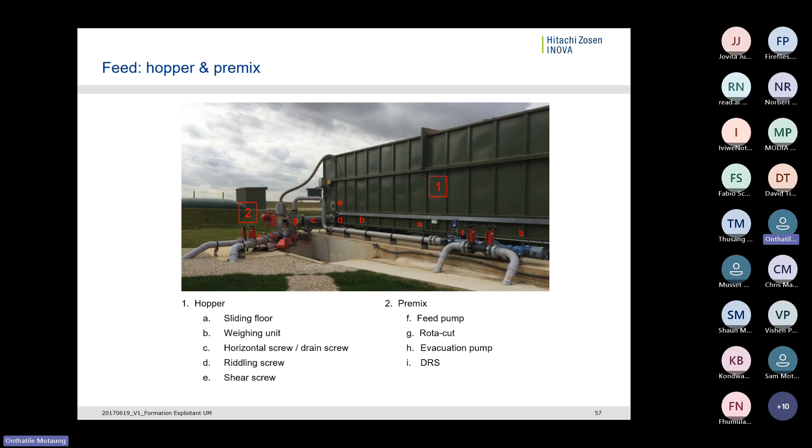So that's your sliding floor, which is operated by hydraulics. This is actually the hopper - it has a moving floor that pushes the substrate forward, and at the end there's a screw, and a screw at the bottom, and something that looks like a plow, which actually cuts. It does the pre-cutting of the substrate to ensure that when it goes to the Rota-cut for fine cutting, it's already sized.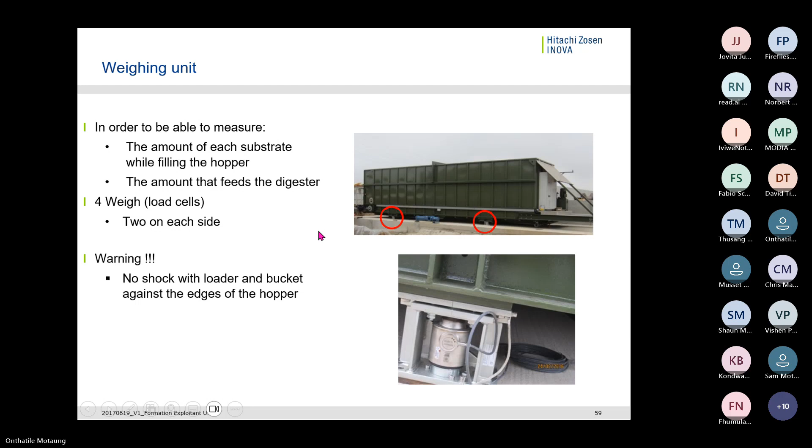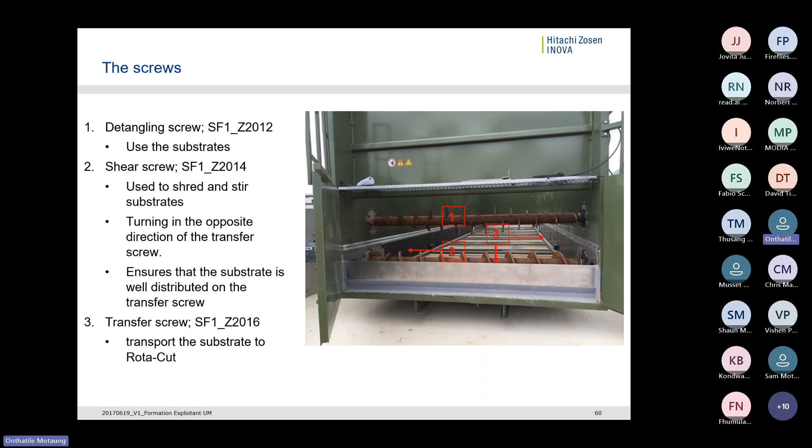And then you have the screws. There's the screw, and number one is the detangling screw - this one, it's got blades on it. Number two is the shear screw, and number three is the transfer screw. So this works together to size up the substrate for the next station.

So this is just a section of the screw parts that will need attention during operation because of the aggressive nature of the juices that come from the substrate.

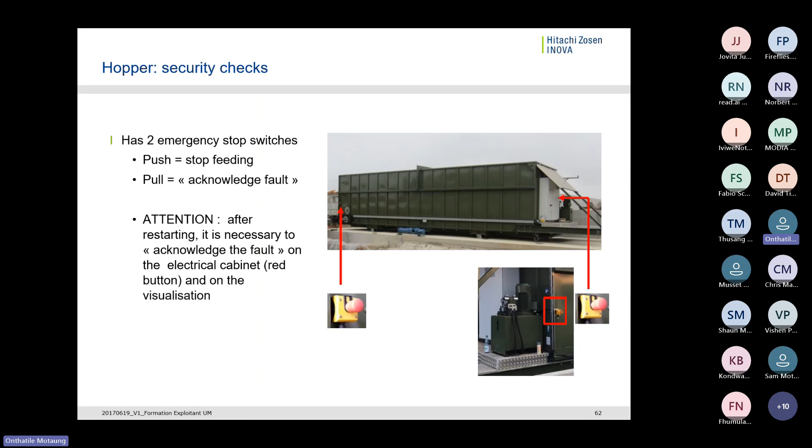And this is just safeties for the hopper. These are the emergency stop buttons. If somebody sees something that's not operating effectively, this can be pressed to stop the operation, because the hopper is not stationary - well, it is stationary, but it has moving parts, the floor, and then the screws that I've shown you now.

Sorry, I had that. I still have some time, Chair.

Actually, how many minutes do you need to complete? Maybe 2 minutes or 3 minutes. Okay, yeah, please go ahead, and then we'll leave the remaining time to address questions. All right, that's fine. Thanks.

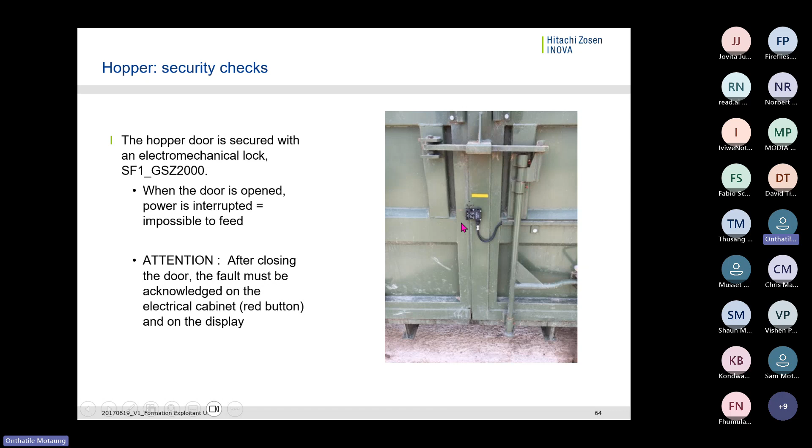So this is hopper security. The door of the hopper also has a magnetic lock that detects whether the door is open or not. Because there are rotating things inside, if this is not closed, it won't allow those pieces of equipment to operate, just for the safety of these things.

And then there's also the twin rod probe. We've already seen it in the digester. You also have it here as well to measure the level inside this thing. It's another additional security in case the load cells are not working properly. When this thing gets hit by a load inside, then it will actually stop feeding and other things, so then it can be attended to.

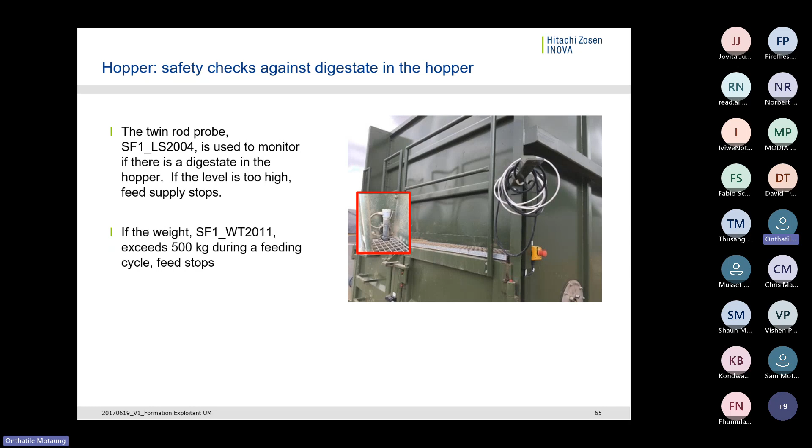So there is a lot of built-in securities. Like I said, this is one of those plants that's highly automated. There's a lot of sensors everywhere to ensure that things are operating optimally, but also safely.

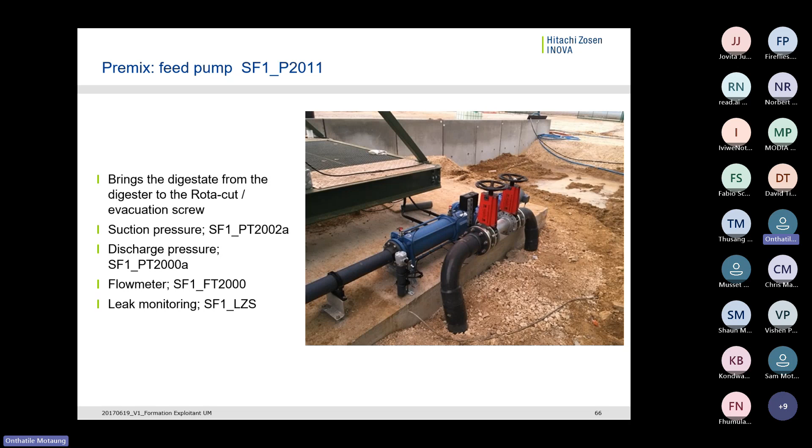Premix feed pump. This is just the picture of the pump itself. It's an interesting pump, though - it's not a centrifugal pump. I forgot now what the name is called... what it's called. It pushes, because you're dealing here with not so flowing stuff.

The digestate - not the digestate, the substrate is still solids. Hence, it gets mixed with the digestate to make it flow a bit. But yeah, it's not a centrifugal pump. It's a different pump - the Rota-Cut, this is the one.

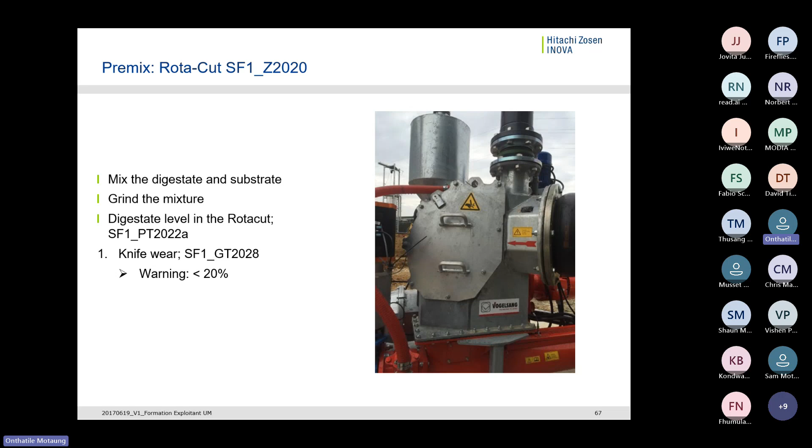So what it does, it mixes the digestate and the substrate. It grinds the mixture to the levels that are required. And then at the same time, it has a knife inside, and the system tells you the condition of the knife. If it reaches the warning at 20%, and if it reaches 1%, it can be changed.

Sorry, I was just plugging in my computer while I'm talking.

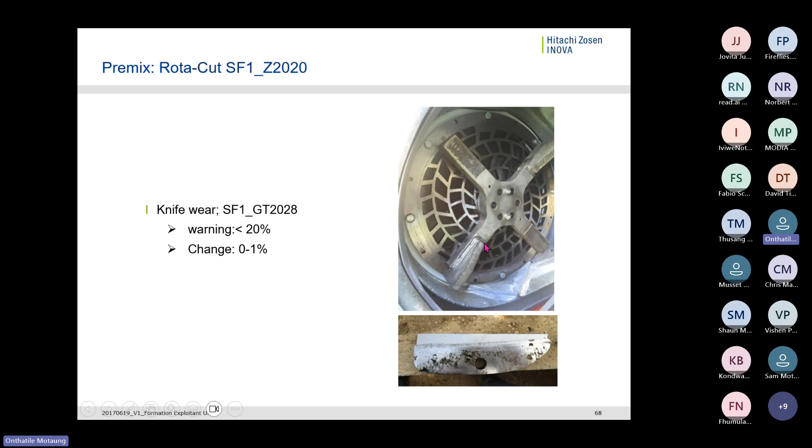So this is the rotating mechanism with the knives that cuts - in fact, there is the knife head that has been taken out. So it measures, it measures its condition.

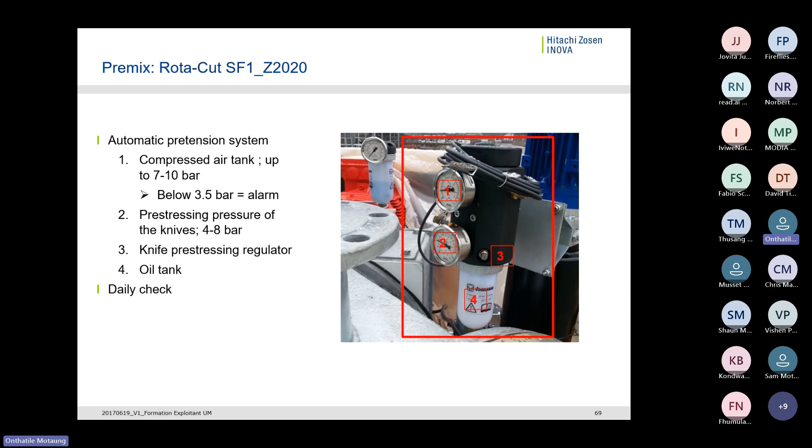And then the pre-tension system - these are the operating equipment that helps the Rota-Cut operate effectively. It uses compressed air, so these are just the parameters of the compressed air in terms of pressure required to make this operate effectively. There's an alarm setting of 7 to 10 bar, and alarm at 3.5. And then pre-stressing of the pressure on the knife is 4 to 8 bar. So these are just the things that give you proper operation of the Rota-Cut.

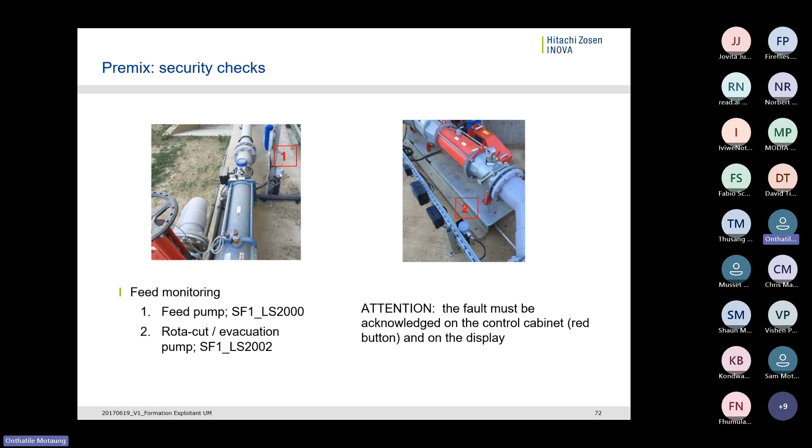I think I will stop it here, Chair and the team. I hope I have shared a bit of an intimate close-up of the complexity of the kind of equipment that's at the digester, so that you have a bit more appreciation of what really goes on beyond just the biological process of generating gas, but the actual equipment that helps you to generate this gas effectively and also safely.

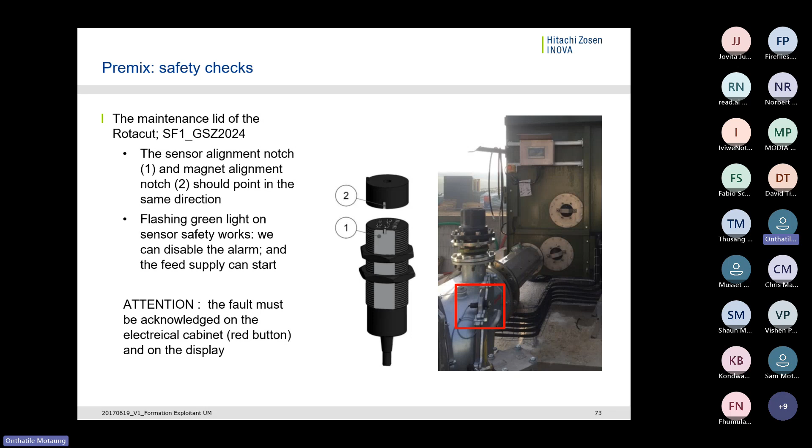Thank you. Thank you, Moses, for the presentation.